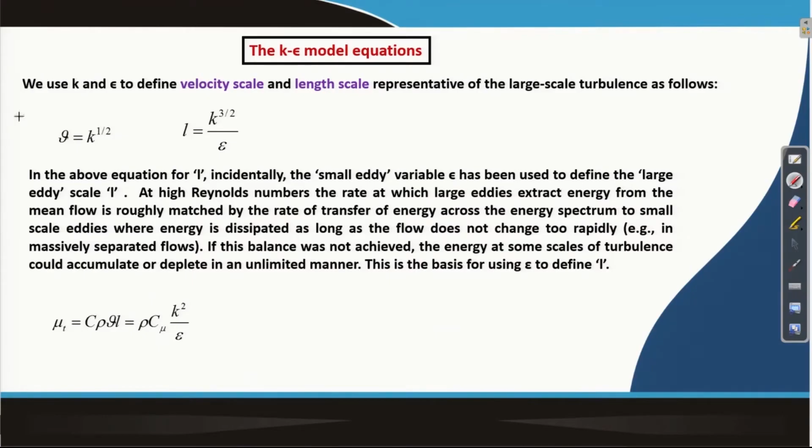the exact equations. So, we would look at K and epsilon to define velocity scale and length scale, which are representative of the large scale turbulence. These are the two equations we are proposing on more of a dimensional basis, and we would like to note here that in this equation for L, remember that L is the length scale associated with the larger eddies. However, in this equation for L we have the dissipation, which is associated with the small eddies. We have talked about the fact that dissipation occurs at the smallest scales.

So, what is the basis on which we are introducing that when we are defining the length scale for a large eddy? The point is that at high Reynolds numbers, the rate at which the larger eddies extract energy from the mean flow is roughly matched by the rate of transfer of energy across the energy spectrum to small scale eddies, where energy is dissipated, as long as the flow does not change too rapidly. That means there is some kind of an equilibrium. If this balance was not achieved, the energy at some scales of turbulence could accumulate or deplete in an unlimited manner. So, this is the basis for using epsilon when we define the length scale for the larger eddies.

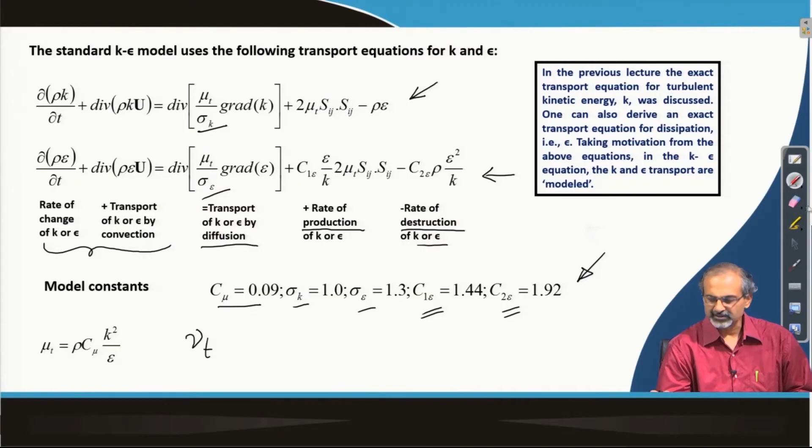As we do that, let us use a slightly simplified nomenclature, because it will be more convenient for us to express it this way: we will just put u bar to represent capital U. Remember that U is capital U plus U dash, V is capital V plus V dash, W is capital W plus W dash. That was the nomenclature we were using till now, and we are just using the over bar to represent the mean quantities. That is one. The other thing is that we are going to use the index notation, which makes the representation of the equations simpler.

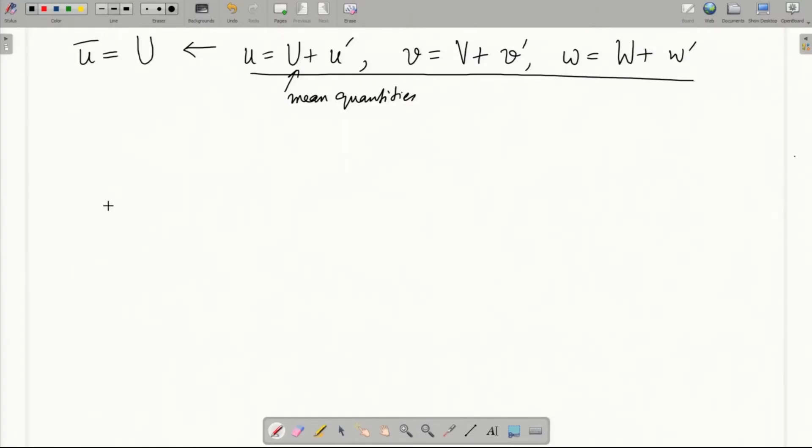So, in the index notation we often use the Einstein summation notation, where repeated indices, wherever they occur, are summed over the entire range. We will understand this aspect further as we write the equations.

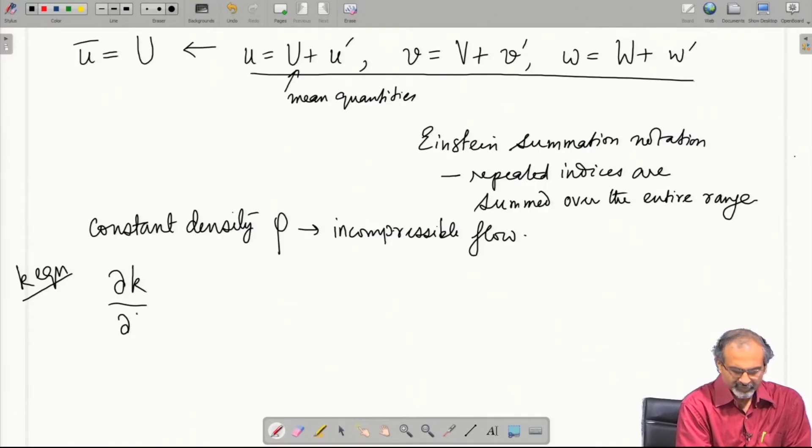So, if we follow these steps, and we also consider that we are talking about a constant density case, since we are talking about incompressible flow, then the representations become simpler, and you can then write the k equation of the k epsilon model either this way, or you can prefer to write it this way. So, we are just showing alternative forms.

So, we said repeated indices. So, you can understand that here you have a repeat of index i. So, basically i in a 3-dimensional flow will go from 1 to 3. That means x1 will mean x, x2 will mean y, x3 will mean z, and so on. So, you will have d/dx, d/dy and d/dz all summed up through a common expression like this. So, that is the convenience of the index notation.

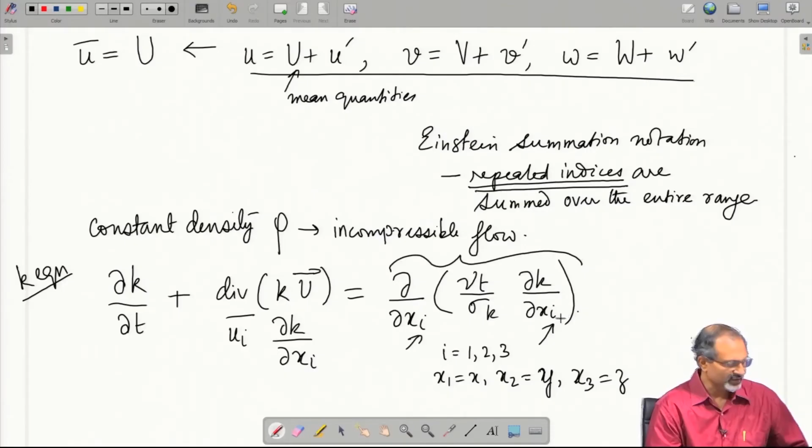Then you have the production of k, which is often represented as G, or in some books also as Pk, production of k, and then minus epsilon. So, this is your k equation, and then we recall that G is 2 nu_t S_ij scalar product of the rate of deformation tensor.

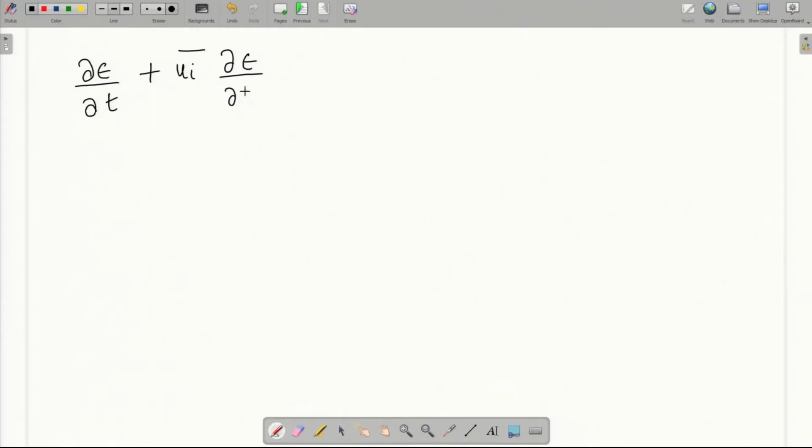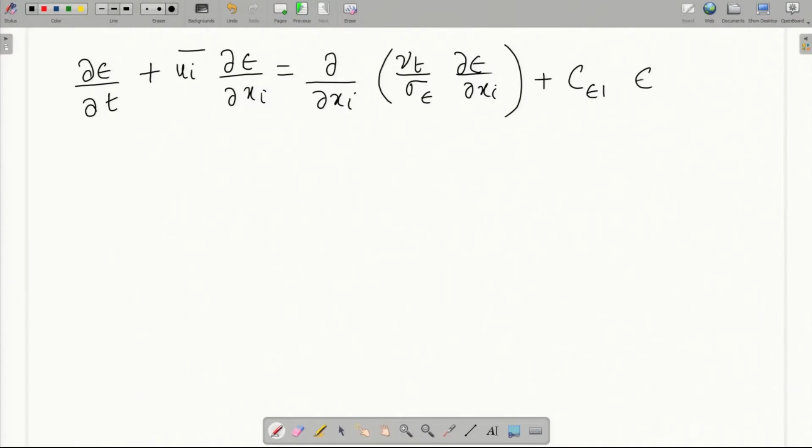On a similar approach, you can write the epsilon equation. So, this is how the equations look like, and then the G term is a very important term for us. So, as we said, it is 2 nu_t S_ij scalar product, and then that will turn out to be nu_t times

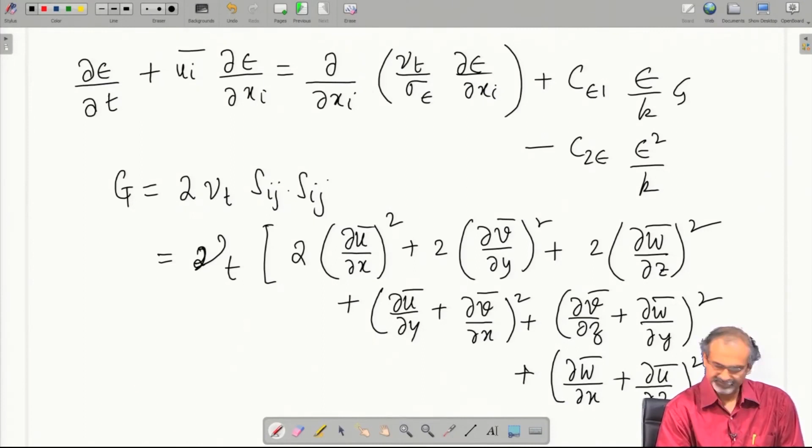So, as you can see, the production of turbulent kinetic energy involves a whole lot of velocity gradients related to the mean flow. These overbar quantities are all related to the mean flow, which means as long as you have large gradients available in the mean flow, there will be a large production of turbulent kinetic energy, and that happens when you have shear existing in the flow. That is why we had emphasized that in order for turbulence to exist and thrive, you need to have shear in the flow.

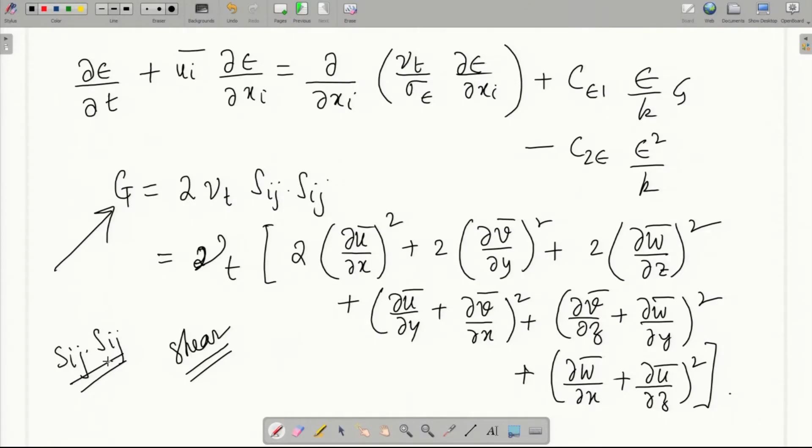So, this expression of course we had done briefly earlier. So, you can also do it as a homework problem, doing the scalar product of these two tensors. So, now what we have is the Reynolds averaged Navier-Stokes equations, and additionally we have the continuity equation and the two transport equations, k and epsilon. So, these equations have to be solved as a family in order to compute the turbulent flow.

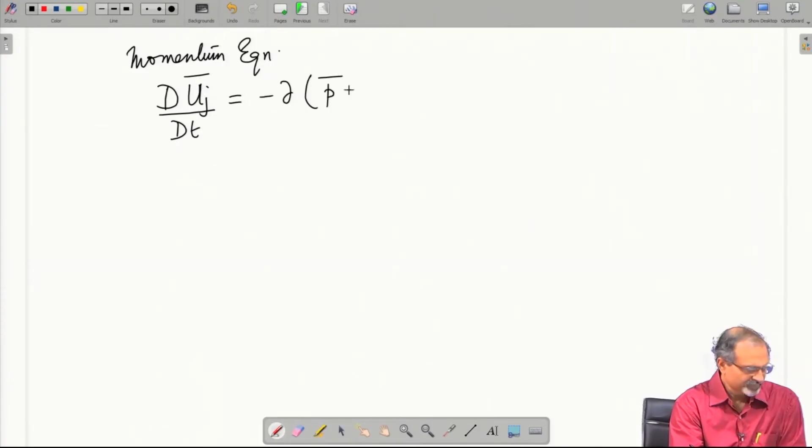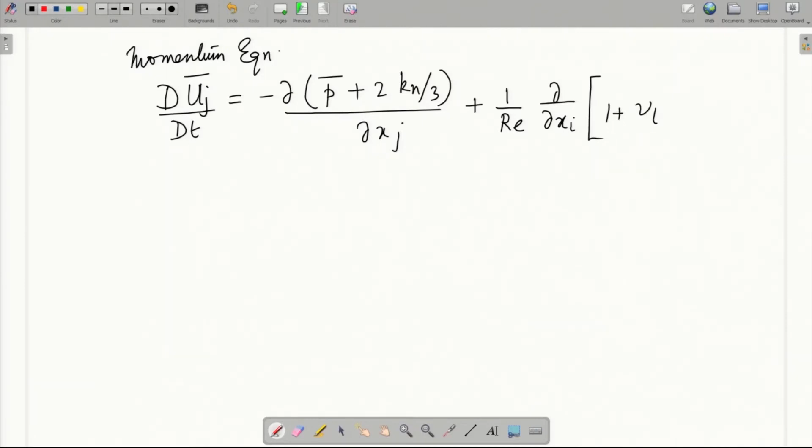So, if you look at the momentum equation, it will look like this. So, let us use this. We are going to use normalized variables here, so that we can come up with a non-dimensional form of the equations. So, what we have basically done over here is that we are calling u_j as basically u_j by the reference velocity or mean velocity. So, the u_j bar is now replaced by a normalization or non-dimensionalization.

Similarly for v and w. When it comes to p bar, the earlier value of p bar has been replaced by a non-dimensionalization which works like this. Similarly, for turbulent kinetic energy and epsilon, you can do these non-dimensionalizations and express the equations in non-dimensional form. The advantage is that then you could simulate for different Reynolds numbers in order to show the effect of Reynolds number on the turbulent properties.

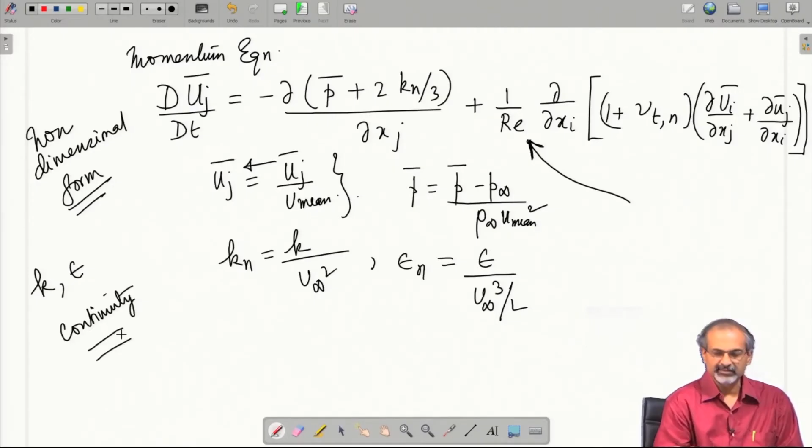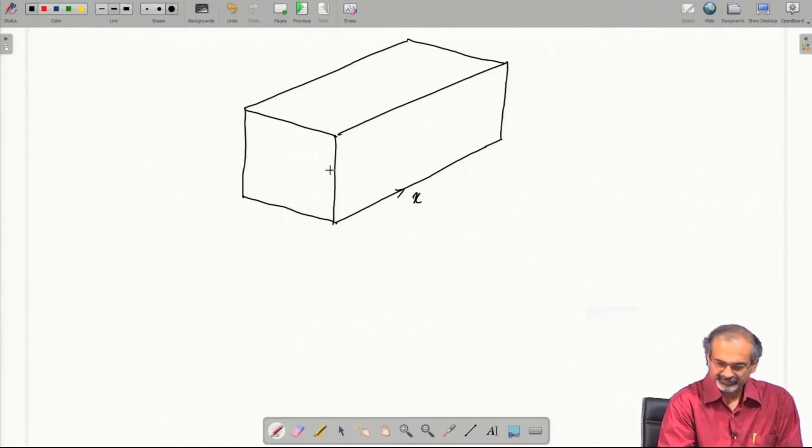So, we can do this non-dimensionalization for the k equation, the epsilon equation and the continuity equation, and then we solve for the system. But of course, before you solve, you have to also set up the boundary conditions. So, let us briefly discuss boundary conditions. Let us set a simple problem for ourselves. Say it is flow through a channel. Turbulence is inherently 3-dimensional, so let us try to set up the problem in a 3-dimensional manner like this.

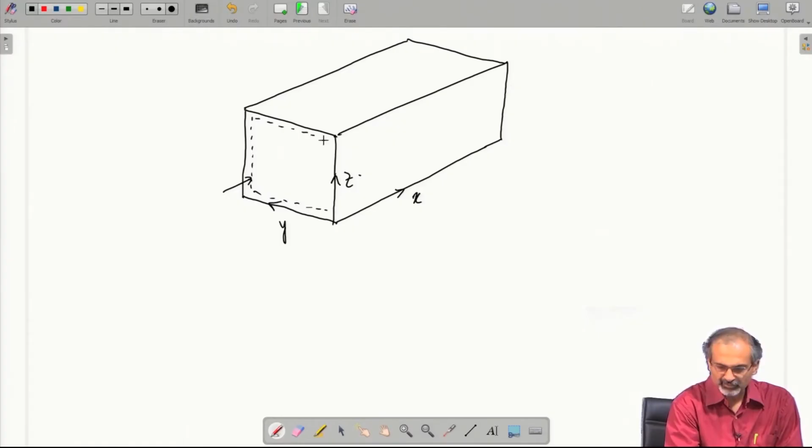So, this is essentially a channel with walls all around. So, computationally when you simulate it, you try to set the boundary cells first of all in order to set the no slip boundary conditions along that dotted surface, and then you try to simulate a flow through this. So, you have a mean velocity which is approaching the channel, and the moment it reaches the channel, it will be constrained by the walls, and then there will be a turbulent flow developing there.

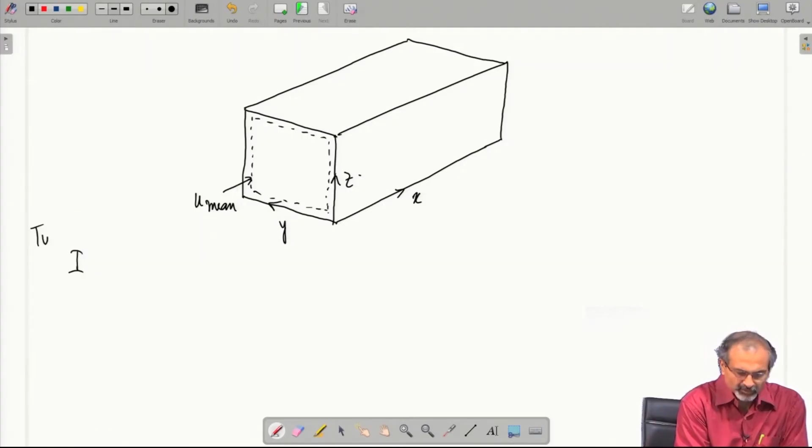So, when you try to solve a problem of this kind, you define turbulent intensity at this boundary through which the flow enters the domain. So, it is basically the inflow boundary.

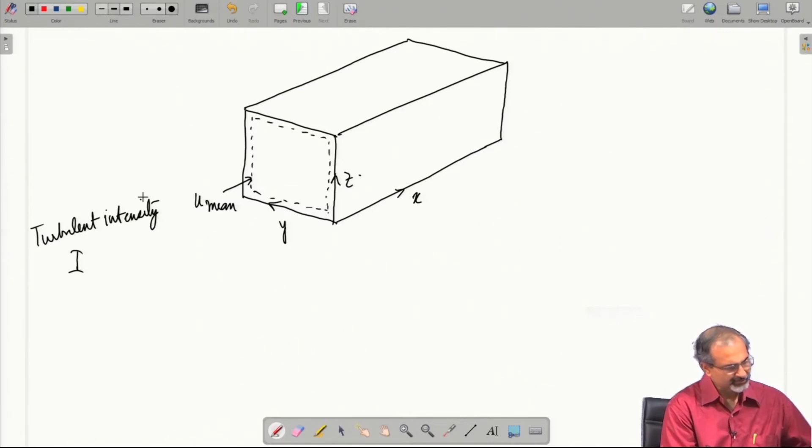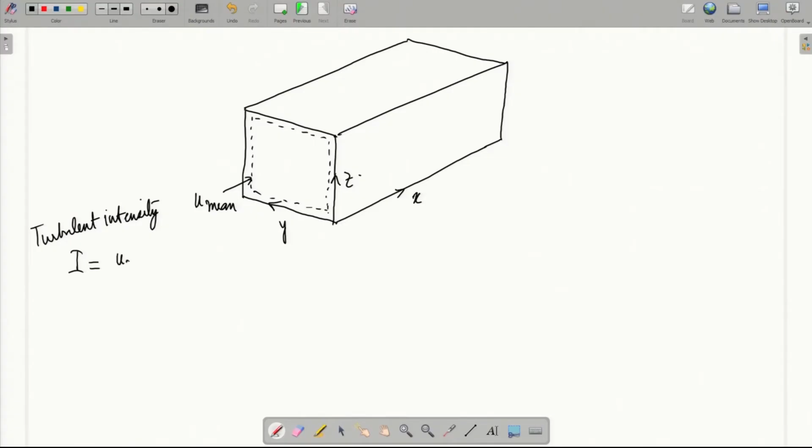So, turbulent intensity is nothing but the RMS velocity, say u RMS, by the u mean, and u RMS is nothing but this. So, that can be easily shown to be equal to 2/3 of the turbulent kinetic energy, and therefore, it is easy to show that k works out to be 3/2 u mean square I square. So, when it comes to the non-dimensional k, it is k by u mean square and therefore, 3/2 I square.

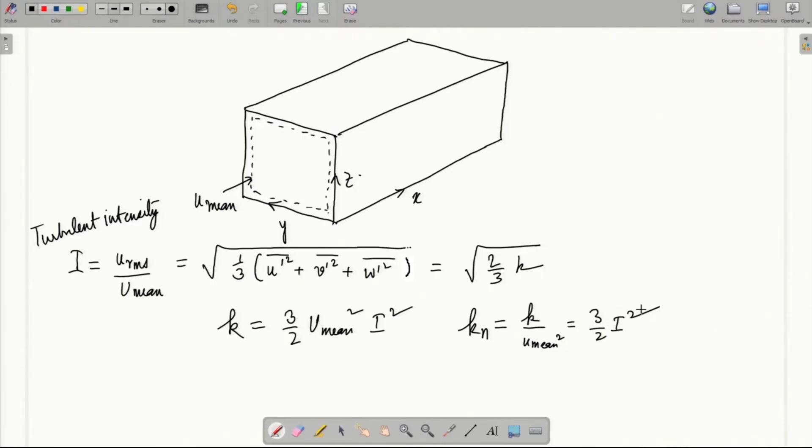So, turbulent intensity, if it is on the lower side, it could be really low, it could be well below 1%, but in a highly turbulent scenario, it may be well into 5-10% turbulent intensity. So, if you fix it to a certain value, depending on the nature of turbulence that you want to feed in the inlet, accordingly the k gets defined.

You can define epsilon also in a normalized or non-dimensional manner as a function of distance from the wall. So, one possible way of doing it is using a relation of this kind. So, it depends both on turbulent kinetic energy at the inflow, the coefficient C mu and the distance from the wall. Again, distance from the wall is normal to the wall. You have different walls and therefore, different normal directions away from the wall.

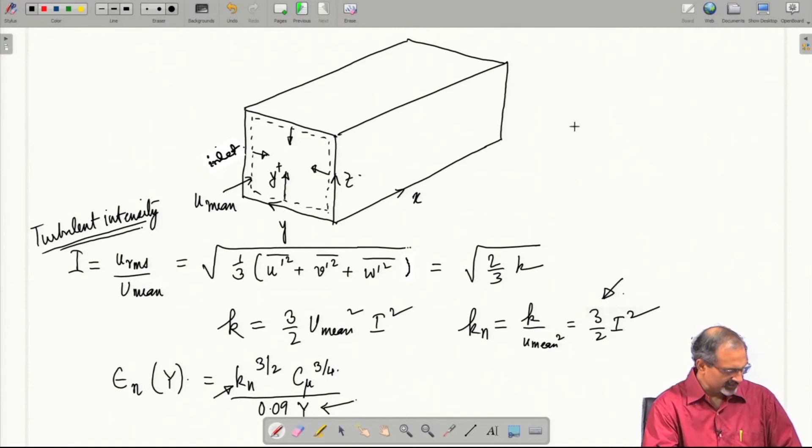Again, you have the non-dimensional y, which is the y plus, which is a very important parameter, which you have to keep in mind. So, we have talked about k epsilon, we also have to talk about what velocities you set at the inlet. So, if you imagine that the first point that you set from the wall is having a distance y in such a manner that you are already into the log law layer. That means, you remember we have discussed earlier that you need to be in this range in order to be in the log law region.

So, in that case you can conveniently use the relation in order to set your u, because u plus is nothing but u by some u tau, and if this tau is again a non-dimensional tau, then you will get the u in a non-dimensional manner, and the y plus on the right hand side of course, is dependent on the actual y away from the wall. So, we will briefly show how to compute the y plus, but before that we just recall.

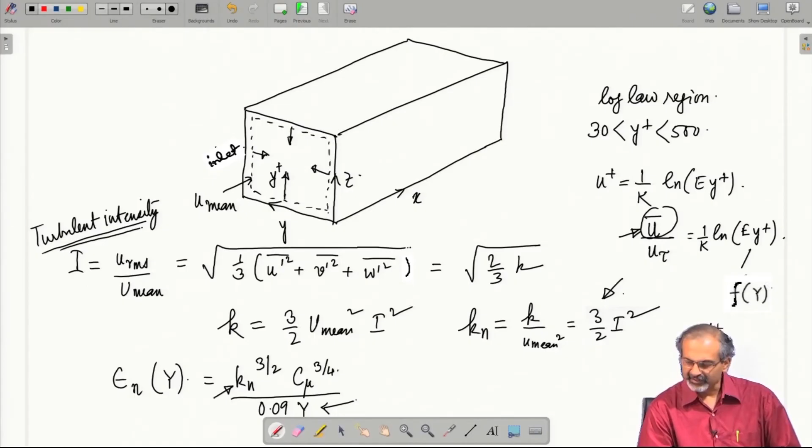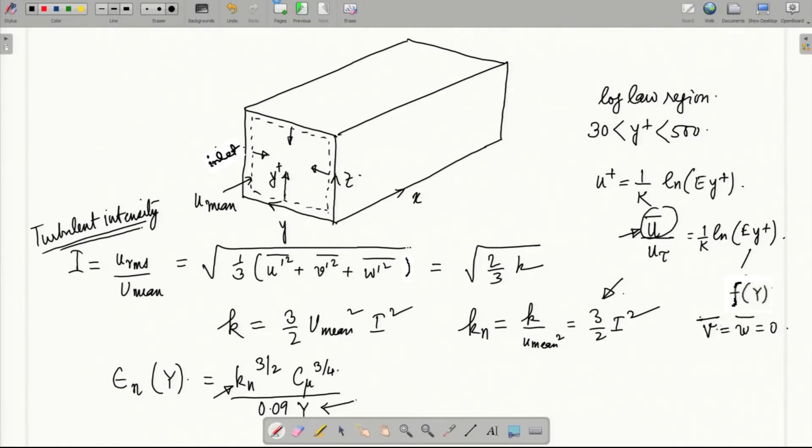So, this is how you define u, and remember that at the inlet you can set the v and w, both of them, to 0. Of course, as the flow gets into the channel, the v's and w's will become non-zero because of the boundary layer formation and so on. Now, a very brief idea about how to compute the y plus.

So, let us say the first grid point away from the wall that you are locating is at a distance of y p. Then you can use this log law equation and then define a function, say capital F, which is a function of u tau, and then you use the Newton-Raphson method in order to refine the value of u tau, for which you also have to have the derivative of the function, and m is essentially the iteration level of finding the root or refining the root.

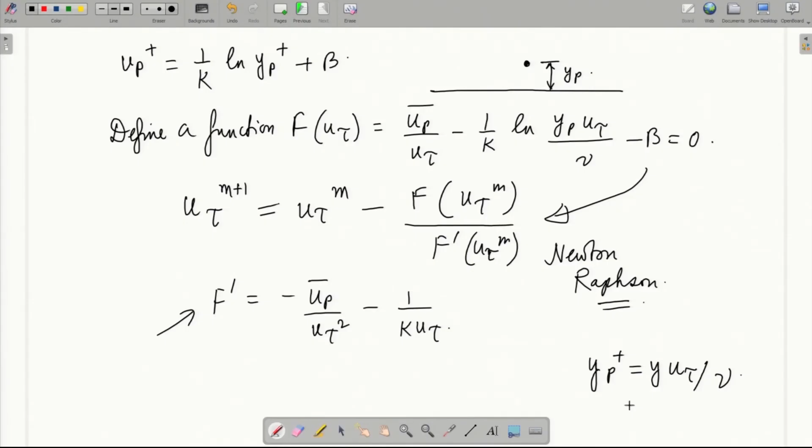Note that F dash is this, so if you feed these expressions into this equation, you can refine the value of u tau till it converges. Once it converges, you can feed it back to the y plus equation and check whether you are actually within the log law layer or not. If not, you have to tune the distance y p to make it greater or lesser accordingly, so that you finally fit into that range. So, this is essentially the way we locate the first grid point, so that it is within the log layer.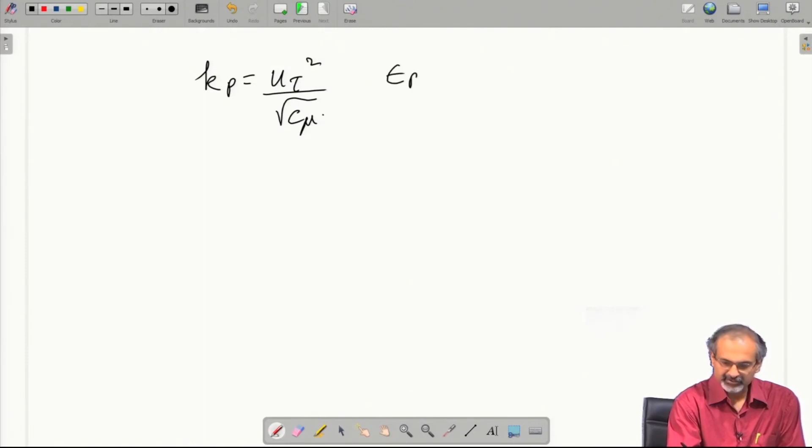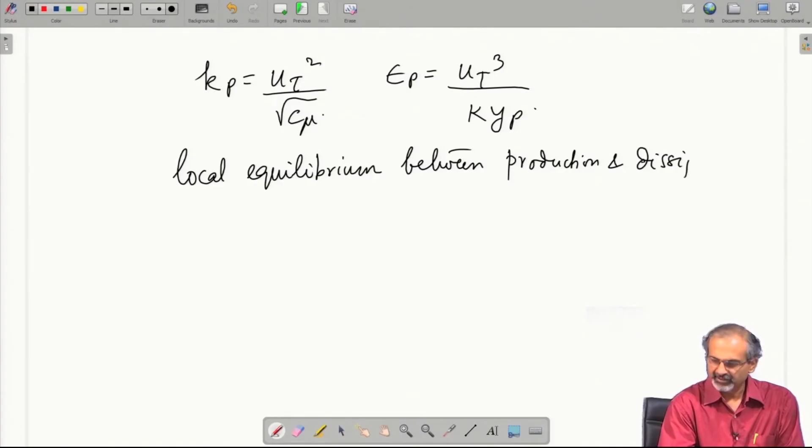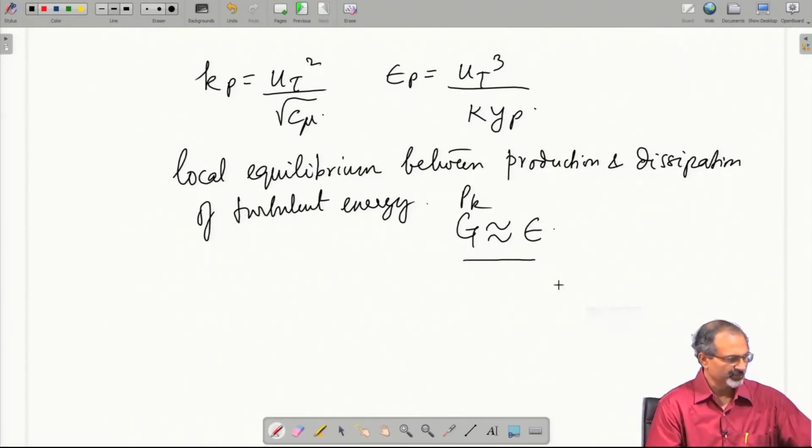Once we have done that, in terms of that u tau also, you can compute the k and epsilon, which is based on the concept of local equilibrium between production and dissipation of turbulent energy, which means G is approximately equal to epsilon. G or P k, whatever you call it, is approximately equal to epsilon. So, that is when they are in equilibrium approximately. Again, this is a good time to relook at the structure of the RANS equations that we are using.

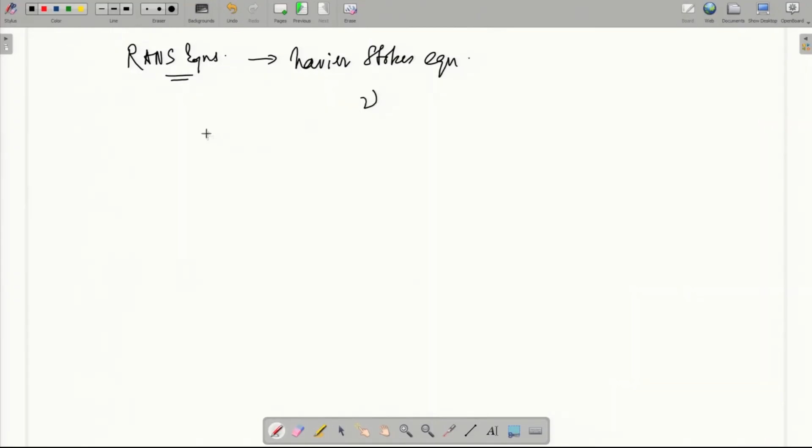So, the RANS equations, when you compare them with Navier-Stokes equations, you will find primarily the difference lies between Navier-Stokes using nu and RANS using nu plus nu t. That is the primary difference. The other more subtle difference lies in pressure alone over here and pressure plus 2/3 turbulent kinetic energy over here. Those are the only two things which make them different.

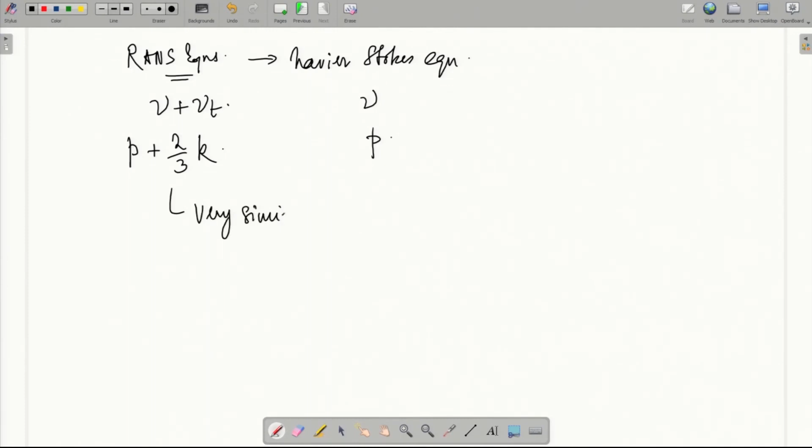So, broadly speaking, RANS equations are very similar to the Navier-Stokes equations structurally, which is of course quite obvious, because you have averaged the Navier-Stokes equations to come to that. Now, that basically means that all the strategies that we use for solving incompressible Navier-Stokes equations apply in solving the RANS equations. So, that is very, very important.

The main thing is that we solve as though for a non-constant density flow, but again not in a compressible sense. The density change is essentially due to the effect of turbulence, because of augmented stresses due to Reynolds stress effects.

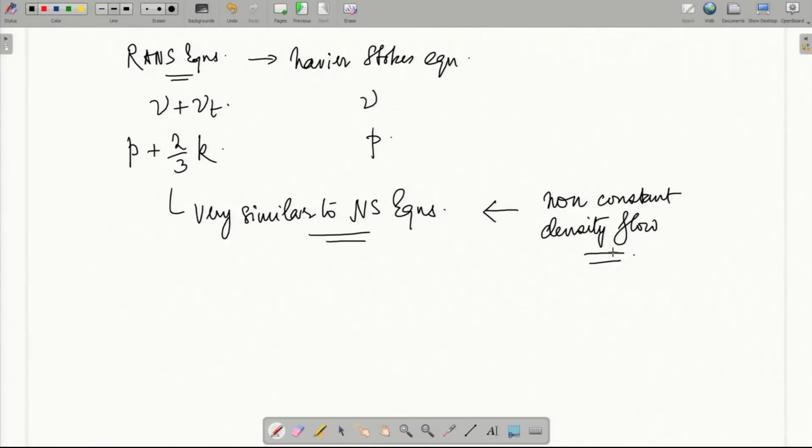So, after solving the RANS and the continuity equation, we solve for the k and epsilon equations, so that we can assess the nu t, the turbulent eddy viscosity. That updated eddy viscosity is again fed back to the RANS equations, and then this computation goes over and over.

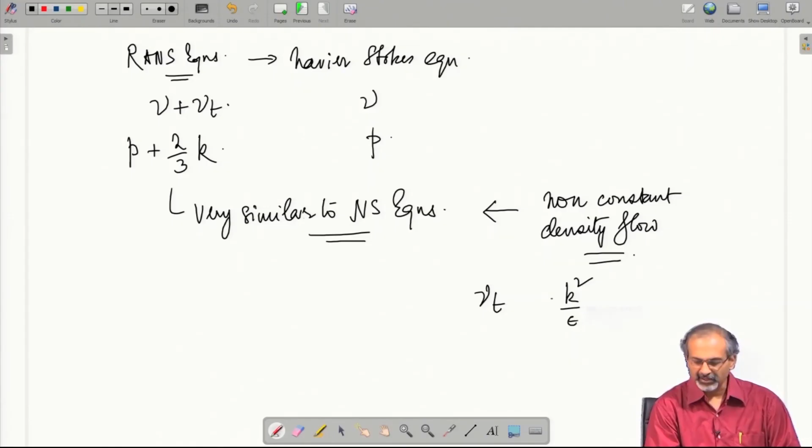As you do that, you can realize that RANS is being solved in the beginning. So, you have a nu t term in the RANS equation, which is dependent on k and epsilon, and you have not solved the k and epsilon equation at that time step. So, you are not aware of the updated value, but you can always use the previously available value to assess the nu t, and that way the computations can be made sequential.

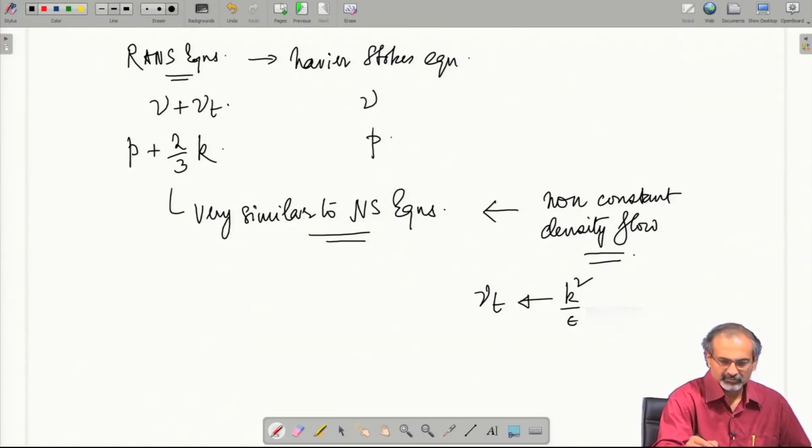So, when it comes to time stepping the k epsilon equations, again their structure is very similar to the general transport equation. So, the different discretization techniques that we have learnt earlier should generally fit in. For example, you have terms related to advection and diffusion, which we have dealt with very elaborately in our module on advection diffusion equations. Those terms can fit into the left hand side and right hand side of the k epsilon equations, but the newer ones are the source and sink terms.

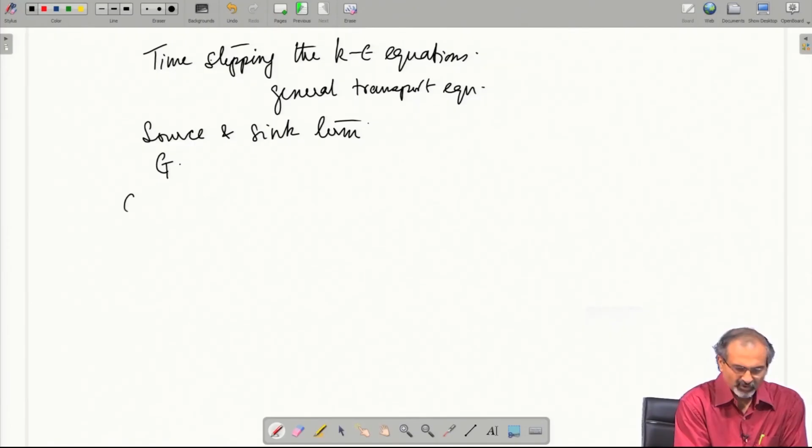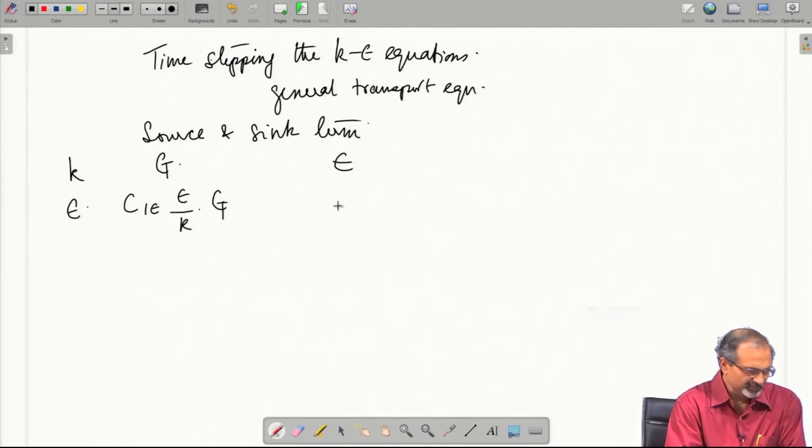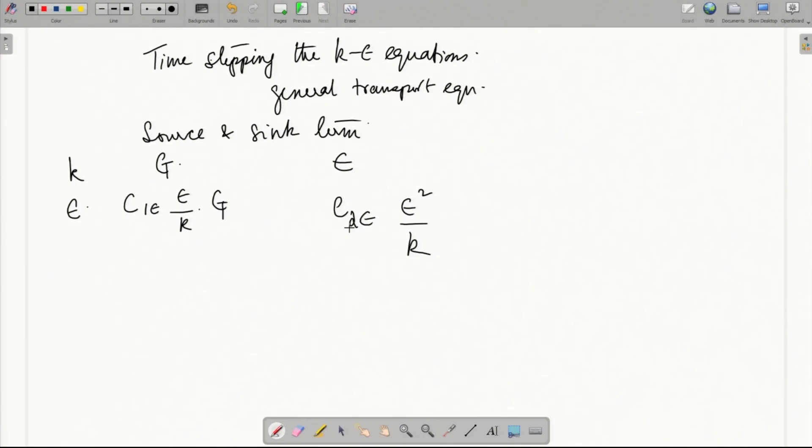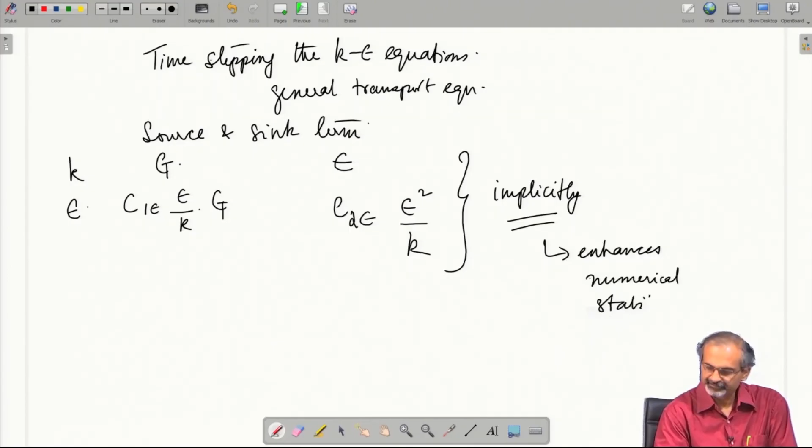Source in the sense, say the G or C1 epsilon by k G, this is for the k and the epsilon equation. And what are the sink terms? These are the depletion terms. So, when it comes to the sink terms, it is reported in many works on k and epsilon that it is better to treat these sink terms implicitly rather than explicitly, because that enhances numerical stability. So, keeping that in mind, we will show a typical time stepping strategy.

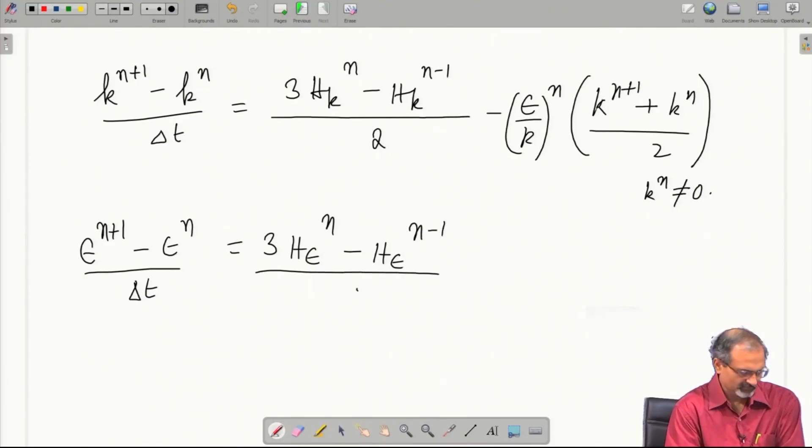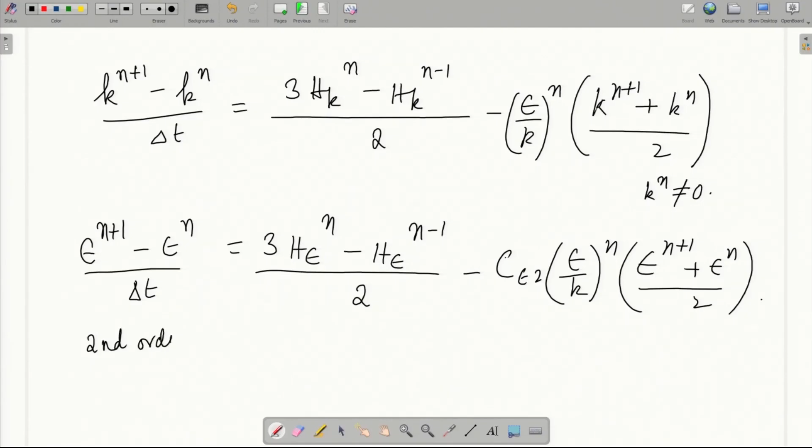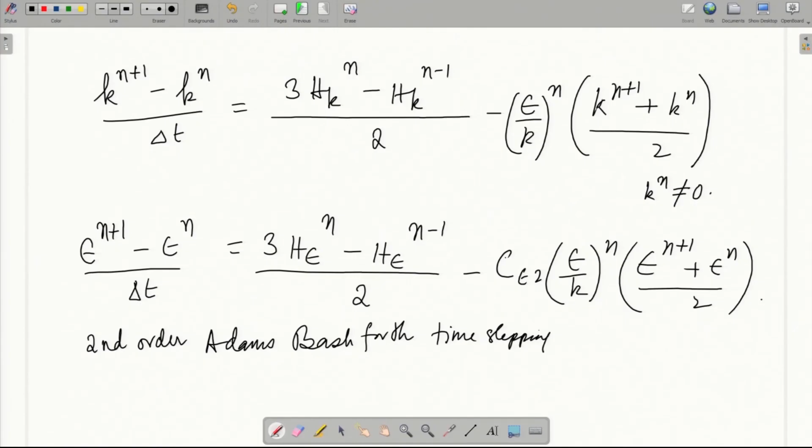So, here the type of discretization we are using is a second order Adams-Bashforth time stepping for advection, diffusion and production terms, which are all clubbed in the terms named as H. So, advection, diffusion, production all are clubbed into the H terms.

What is left alone are the sink terms, and we are using the Crank-Nicolson scheme for time stepping the sink terms. As we recall from our previous study, Crank-Nicolson is a semi-implicit scheme that enhances the stability. So, you are invoking from both n and n plus 1th time steps, that will enhance the stability.

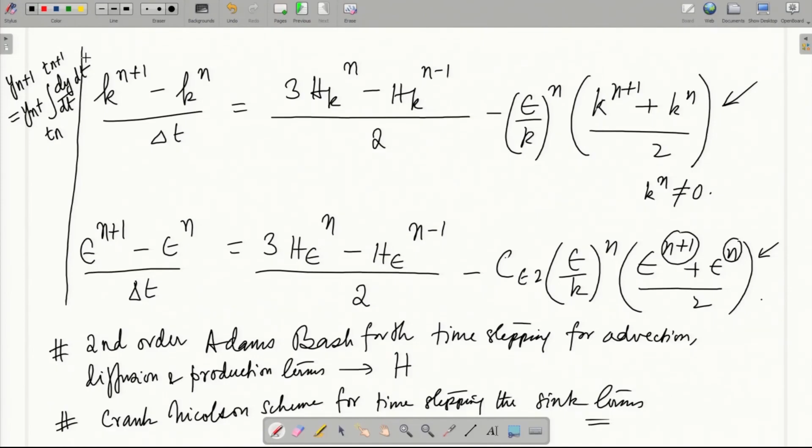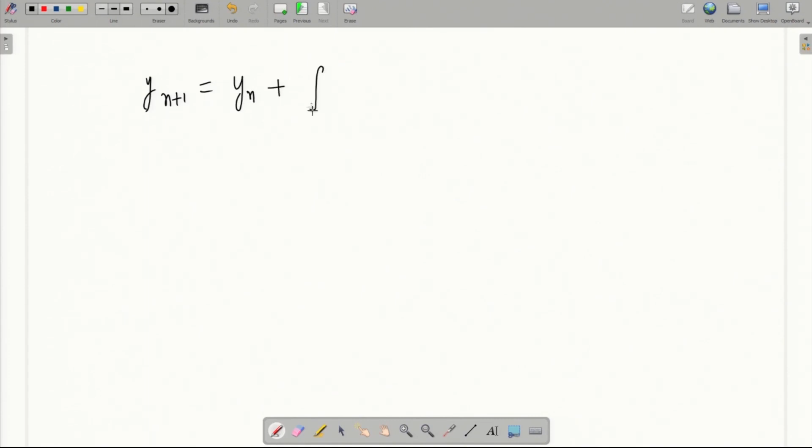Remember, if you go back to your maths courses where you have learnt about initial value problems, where you are doing a calculation of this kind, you are solving for y n plus 1. Let us write it a little more clearly here. Adams-Bashforth does it using a formulation of this kind.

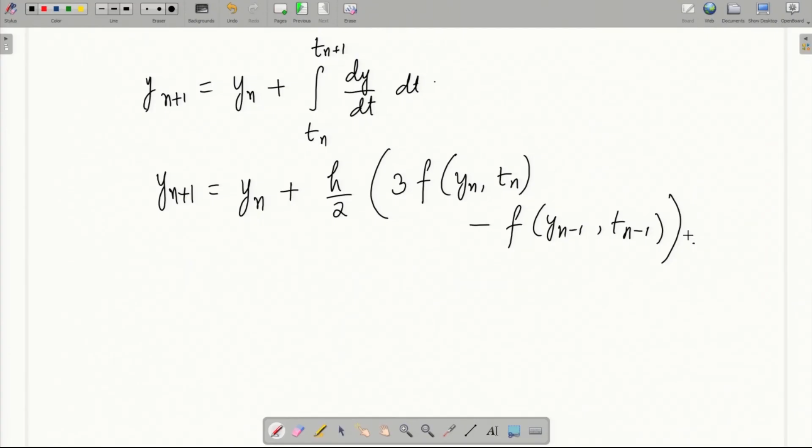So, with this we end our discussion on k epsilon model equations. We will discuss LES and DNS in our next lecture.